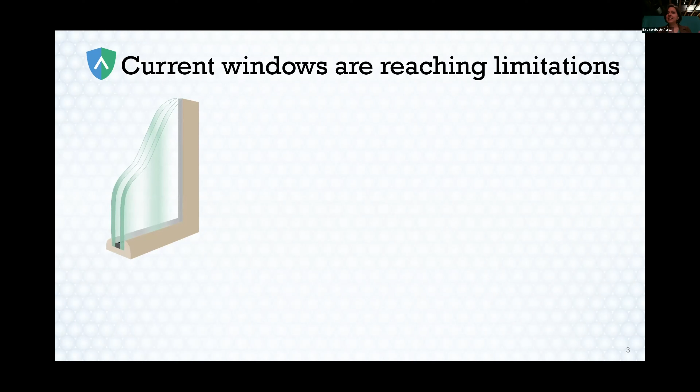But the problem is the current products that we have today are really starting to reach their limitations. So the most common product is to take 2 panes of glass and use those to create an interlayer of gas that insulates those energy losses within your building. Now, the problem is that when we try and increase that performance over just this single gap, we typically create another gap in order to get the next level of energy performance. But that often comes with lots of challenges when it comes to manufacturing price, shipping price, installation.

And the result is that the end consumer is really stuck with making a choice, which is this balance of, I can either have something affordable or efficient. And for that reason, our high performance window products are less than 5% of new installations in buildings. We at Aeroshield feel that that's just a problem, that there should be a solution where you can get both performance and cost at a point where consumers can have access to it. And so that's what Aeroshield seeks to do, is to bring a product to the market that can have all of that high performance of a triple pane, but with all of the price tag and the form factor and the ease of installation of a double pane.

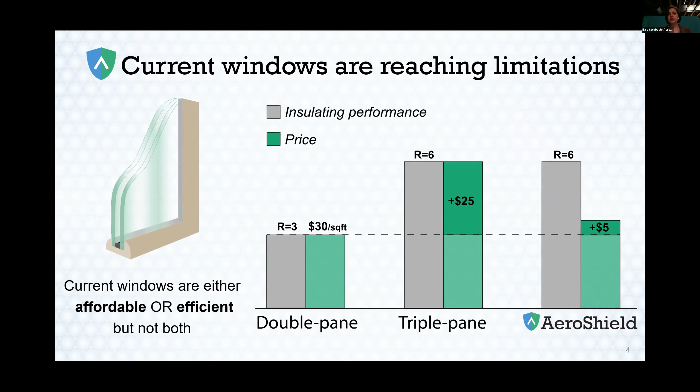And so we do that by fundamentally changing what we're using to insulate our windows. And at the key of this is actually the Aeroshield material, which is this sheet of porous glass. It's based on something called silica aerogel, which essentially means that we're creating this glass sheet that is made up of 95% air. But in our case, we've engineered those little pores that trap all of that air to be so small that your eye can't even see them anymore. And that allows us to create a material that is one of the most insulating materials in the world, actually twice as insulating as air, but at the same time, still having that clarity that we get used to with our traditional glass windows.

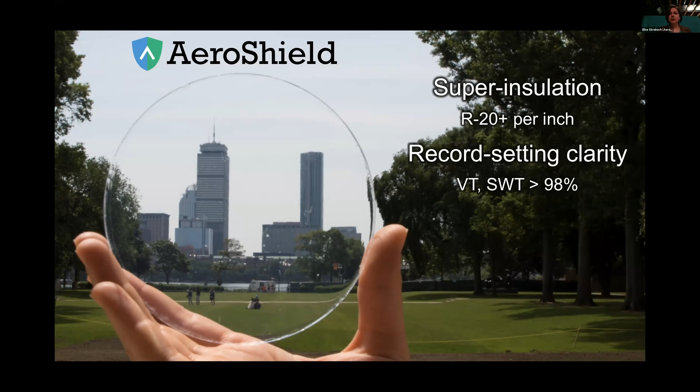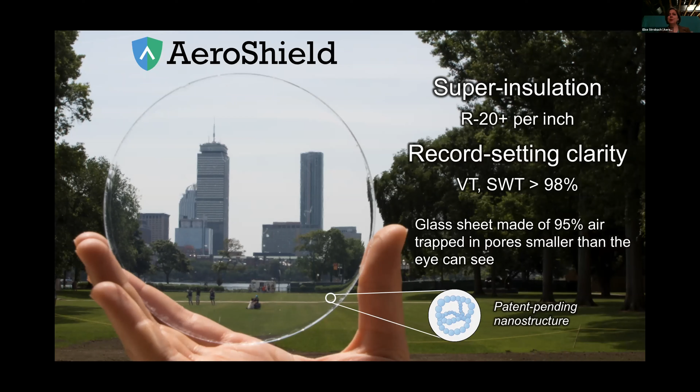And so during my PhD at MIT was when this material was really developed, and we understood the nanostructure and were actually able to patent it to allow this unique blend of super insulation and high clarity, which is really optimized to go into our windows. But the question becomes, what does that mean for you, whether you're working in the built environment or you're a homeowner and you want to have better choices with your products? Well, Aeroshield can help with a lot of problems.

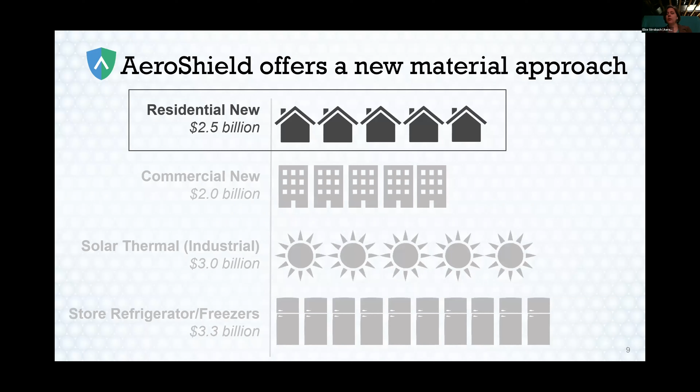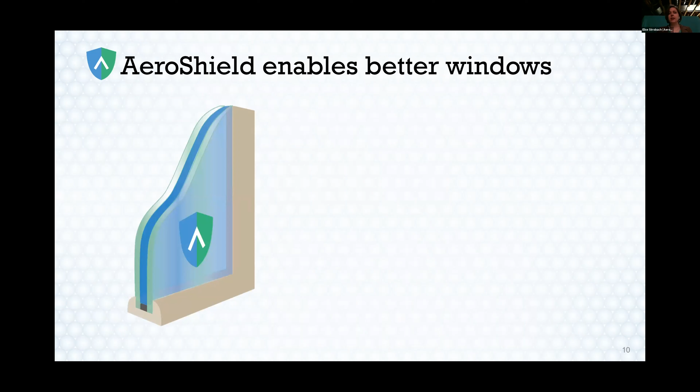At the very core, transparent insulating materials are a huge application space that needs the kind of innovation that we can bring. But in particular, we felt that the residential market had the biggest need and one that we could solve most readily. So the product that Aeroshield starts with is taking a traditional double pane and simply replacing some or all of that gas fill with a sheet of our material. And that allows us to unlock really high potential for a window product.

So something that's incredibly insulating, 50% more insulating than an air-filled double pane, something with a payback period that's 3 to 5 times faster than those triple panes that we see on the market, and also comes in a form factor that's thinner and lighter and removes all those barriers with shipping and manufacturing and installation, those kind of trouble points that we run into with these other high-performance products that are on the market.

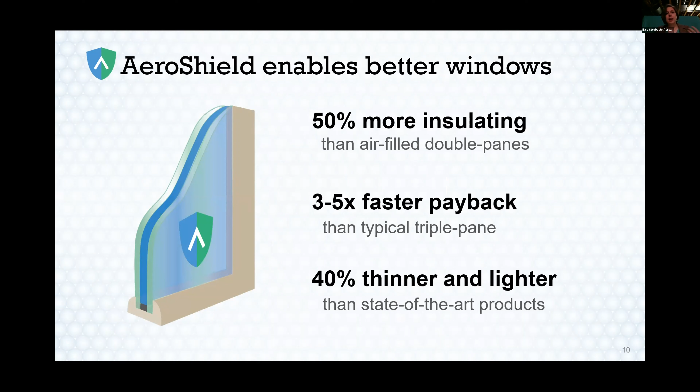And because of the power of this material, we feel like the best way to get it into homes is to be able to manufacture this material ourselves and sell it to existing manufacturers so that a sheet of this high-performance material can be attached to existing glass and drop into the traditional double pane manufacturing. That means that we can come in at a lower cost point and really pass those savings on to the consumer. It also means that you can have Aeroshield in all the different diversity of styles and types that you might with a traditional double pane window.

And it also means that you can get access to this high quality performance through those existing distribution channels. So that really is at the crux of what we want to be able to provide, all of this great performance with a low cost.

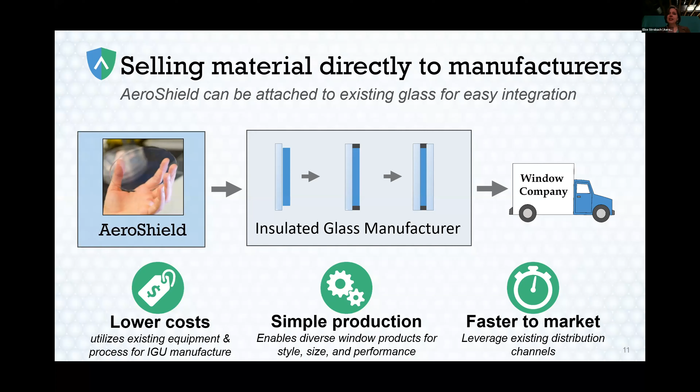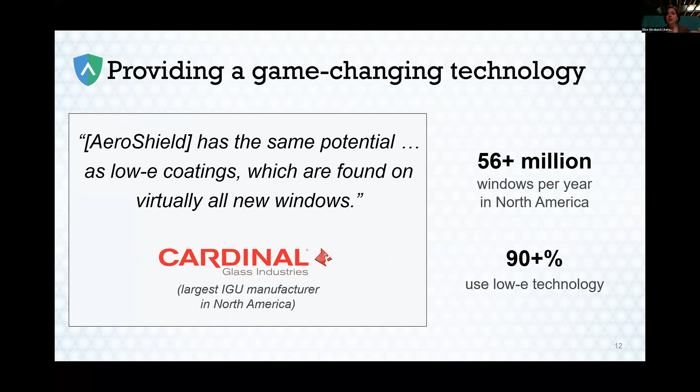And that really comes back to this material fundamentally has the potential to revolutionize an industry, and the fact that its performance is next class. In the past, when technologies like this have been adopted, they really have been able to spread throughout all of our new window products. And we feel that Aeroshield has that same potential of coming in and helping us change the heat transfer through all of our glass that we're producing.

And so that starts with a huge energy savings, just looking at North America, but it also comes with this huge carbon potential. So we really feel like this can be a sustainable choice for our windows. And to achieve that, we've focused on 3 priorities. One, making sure that this is a cost-effective product and that it offers a pathway to really drive energy savings through a cost-competitive narrative for consumers.

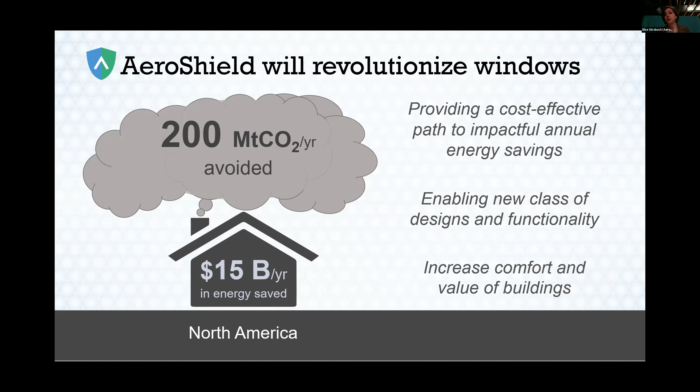We also want to make sure that we're thinking about enabling new designs and new functions. We're bringing a new material to market. We want to figure out how to best use that beyond just initially making our windows more thermally better performing. And then, of course, we're really focused on the sustainability of our product. So looking at how we can increase the comfort and value of buildings so that those can serve end users for a longer period of time is definitely a priority for us.

So to achieve that, right now we're in very early stage. So we have proof of concept of the material and some early prototype. But right now we're working to design and build our pilot manufacturing system to produce industry standard units for testing. And then use that to demonstrate the traction and the scalability of our material in order to gain a customer so that we can be producing in that same supply chain.

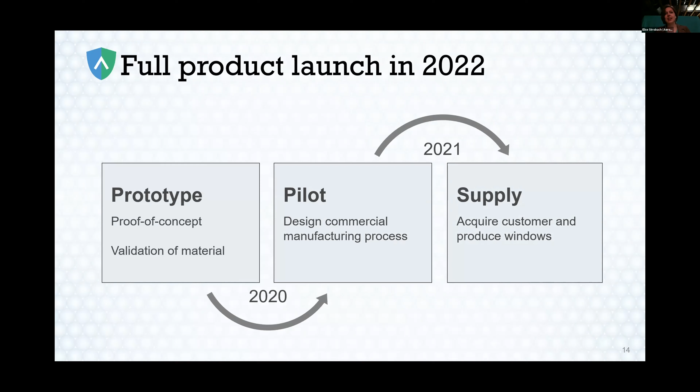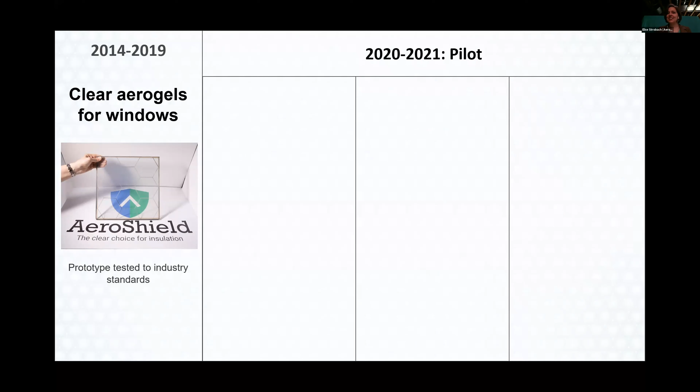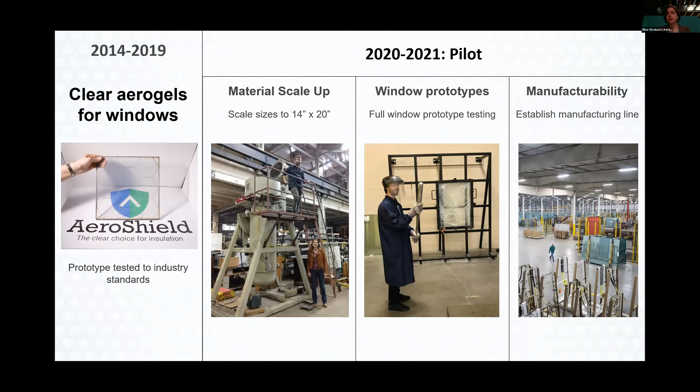So to do that, we have 3 priorities to take this prototype that we already have demonstrated at the lab scale, as you can see here in this picture, with nice little tiled together pieces of our material. Our next step is we need to be able to scale up that material to be able to accommodate units. Also looking at being able to make and test various window prototypes. And then, of course, work on the manufacturability, so making sure that we can connect and plug into that existing manufacturing channel so that these products can be accessed by everybody.

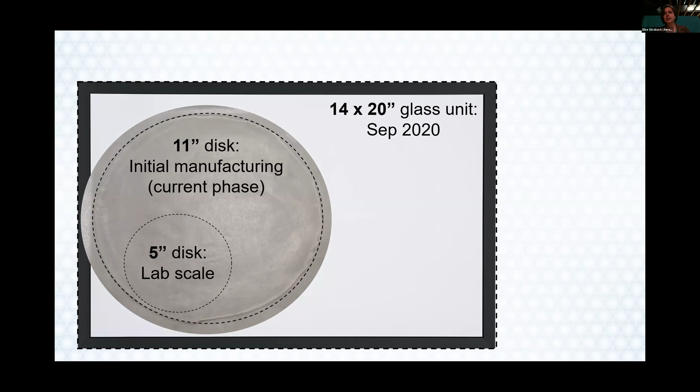So in today's manufacturing, we're working on some very early commercial manufacturing process developments. And that really allows us to start setting up this pilot line where we can be producing 14 by 20 inch glass units and bigger starting late this year, early next year. And that really is the foothold for us to be able to learn, pilot, get into some buildings, put it through some rigorous testing, and aiming to be at full production launch, producing windows in early 2022 at this starting 3x5 phase. And again, targeting really important gains in performance by just integrating into this double pane insulated glass unit.

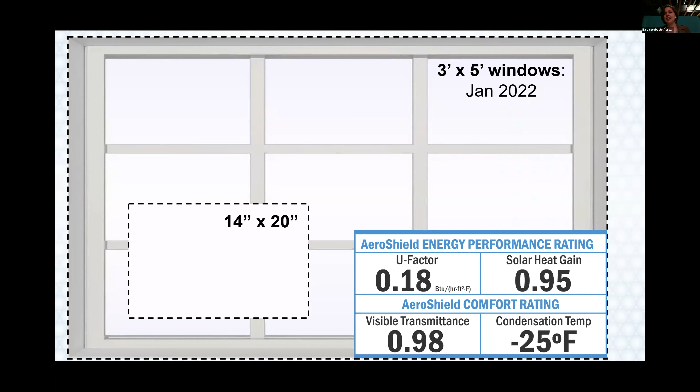So just as a summary, layout of the timeline. So we have this proof of concept. Right now we're working on our production and demonstrating that pilot facility. And that leads us up into being able to produce appreciable volumes of windows in 2022.

So our team is really dedicated to what we're doing. So you have myself, I worked with this material in the lab where it was invented, spent a lot of time thinking about how you commercialize a technology breakthrough, bring it to market so it can be impactful. My co-founder, Kyle Wilke, was also working with me in a lab at MIT. So he brings in the expertise about the manufacturing and leading that development, translating it from the lab into commercial production. We also have our first hire starting this summer, VP of Operations, Aaron Baskerville-Bridges. He's really going to help us think about executing on this vision that we have with the technical and the markets.

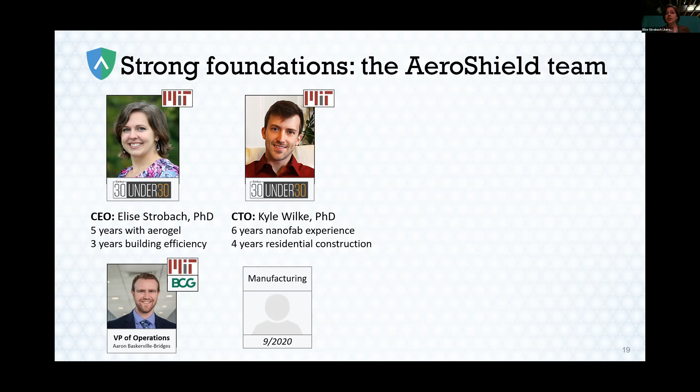And of course, as I mentioned, we're touching on a lot of pieces in a diverse industry. So everything from manufacturing a new material to integrating it into window products to looking at how that window product can impact a building, not only its energy use, but potentially its design. And to help us with that, we have brought on a lot of advisors with diverse experience. But I will say we're always looking to talk to more people in the built environment or people who are passionate about windows to learn what other problems we can solve with this material. To that end, we also are a part of a fantastic community, and really worked hard to understand how to bring this fundamental tech to an end user.

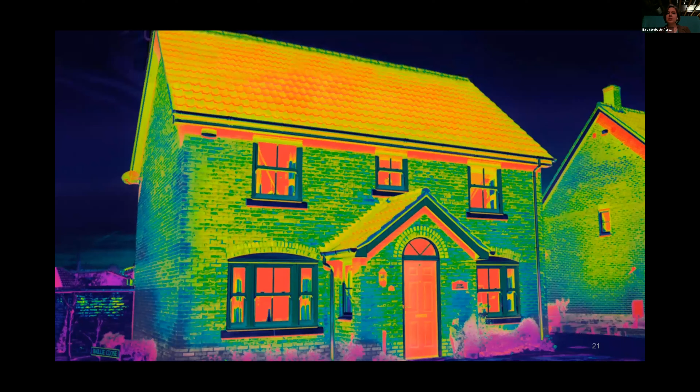And so we feel like we have the right resources, the right team motivated to really tackle this challenge, which is not going anywhere right now. It's that our windows still have these huge energy losses. And when we look at just the glass and what that loses every winter in the US, that's $20 billion in energy. That fundamentally is a problem that Aeroshield can solve.